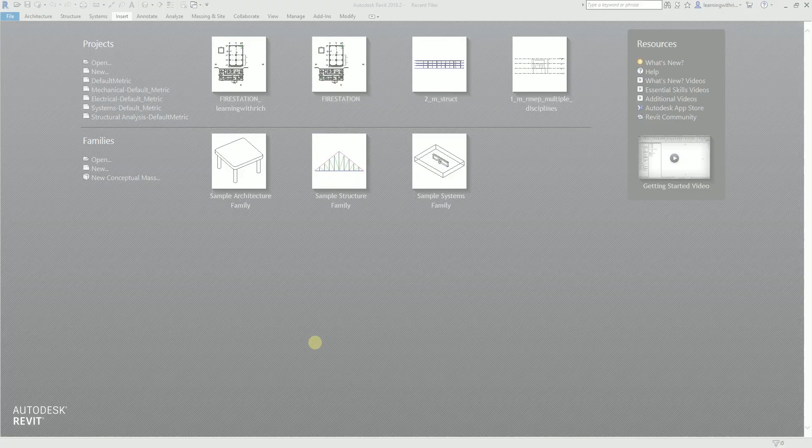In this topic, we are going to continue our discussion about our Revit Architecture Certified Professional Examination preparation. This time, what we are going to discuss is importing drawing and image files. From our previous exercises, we discussed copying and monitoring elements, and we also discussed work sharing. This time, another topic that will show on your examination definitely is importing drawing and image files. So let's get started.

I'm going to open the exercise file for importing. For this exercise, I'm going to teach you how to import a CAD file. There are actually multiple ways of inserting your CAD file inside your project. You can use importing, and you can also use linking. If you have existing designs created using other CAD software, you can actually import or link them into our Revit model to use as a starting point for our design.

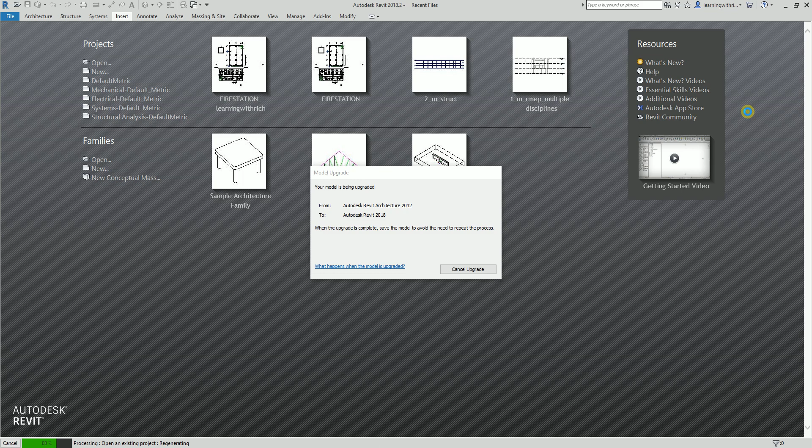In addition to using the Import CAD and Link CAD tools, you can also import CAD files using drag and drop from Windows Explorer into your model, drafting, or sheet view of Revit. That is what we are going to do right now. I'm going to show you how to import, as well as how to link, a CAD file in your project.

If you go to the Insert tab, here you can see Import CAD, and the other one is Link CAD. So what is the difference? If you import the file, you can explode the nested XREF to Revit elements. However, if the XREF file is updated after the import, Revit will not automatically reflect changes to the XREF file.

The other one is Link CAD. If you link the file, Revit automatically updates the geometry to reflect the changes to the XREF files. However, you cannot explode the nested XREFs to Revit elements. So that's the difference: if it is import, once you import your CAD file, you can explode it and then modify it here in Revit, but you cannot update it. If the XREF file is updated after you import, you will not be able to automatically reflect the changes. But with link, Revit automatically updates the geometry, but you will not be able to explode your link CAD file. So basically that is what will happen.

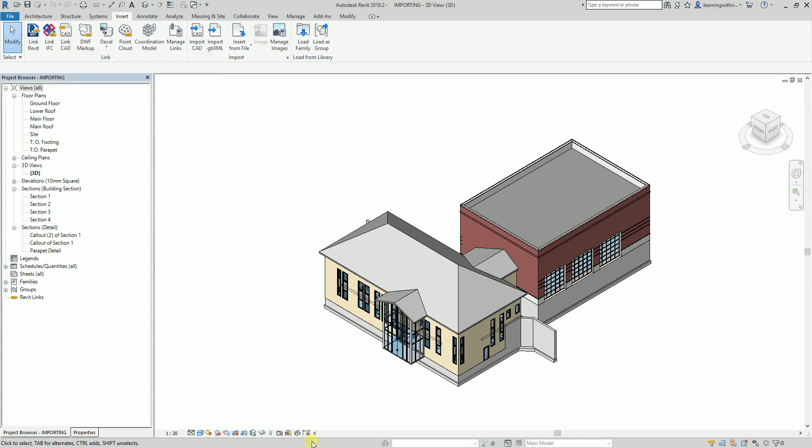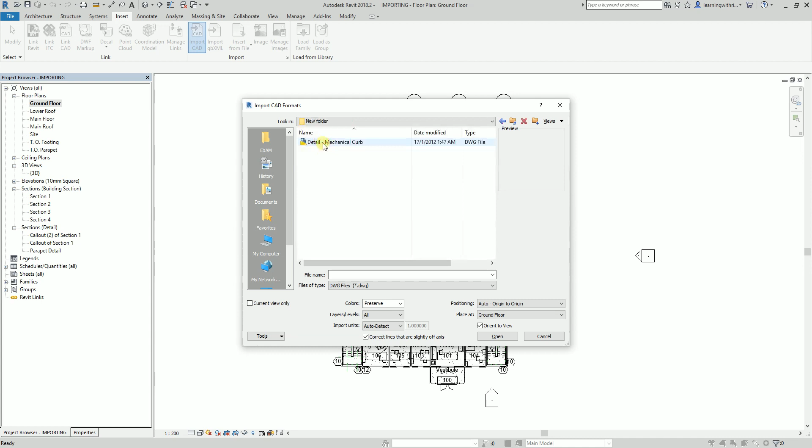So what I'm going to do here is create a drawing. From Insert, Import CAD, importing. I'll try to import this one. I think it would be better if I create a drafting view, so from the View tab, I'm going to select Drafting View. This is the name, I'll just select OK. This is the drafting view.

From Insert, I'm going to select Import CAD and then choose the CAD file, this is my exercise. I'm going to select Manual Origin and then Open. So I'm going to place it here. There you go, and then this is import.

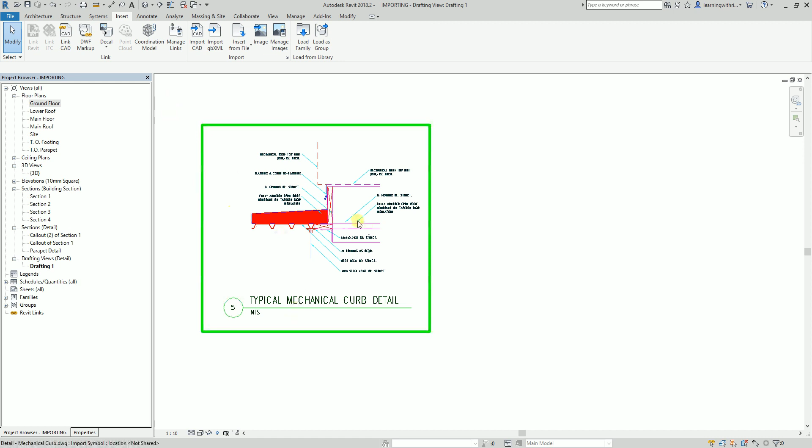If I select the imported CAD file, as you can see, you can actually explode it—partial explode, or the other one is full explode. Now, if the AutoCAD drawing, the XREF file, is updated in AutoCAD, Revit will not be able to automatically update it here.

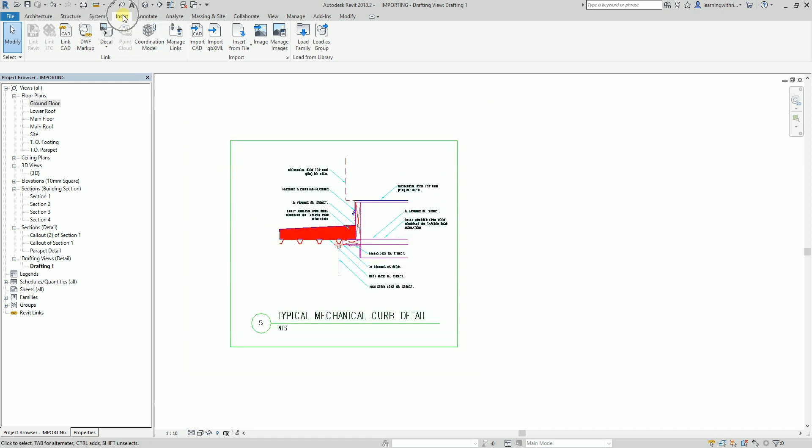The other one is link, so this is another way of inserting your CAD file in your project. I select Link, select the drawing, manual origin, open. So I'll just put it here.

It seems like they don't have any difference at all, but if you select your link model, as you can see, there's no option here for you to be able to explode it. So explode is only available if your CAD drawing is imported.

If it is a link, you will not be able to explode that, but Revit automatically updates the geometry to reflect changes to the XREF file. So if you change the original drawing in AutoCAD and then update it here in Revit, it will automatically update and you'll be able to see the changes.

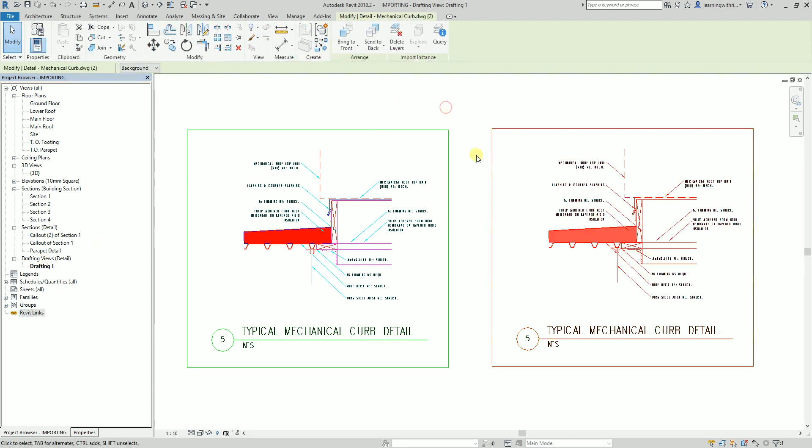But since we are on a drafting view, you will not be able to update this one. Update is only available if you're on the floor plan, 3D view, or section elevation view. But if you're on the drafting view, you won't be able to update it. As you can see, there's no link here. Although you already linked this one, it doesn't detect it because it's inside the drafting view. Anyway, that's basically how you import an AutoCAD drawing into your Revit project.

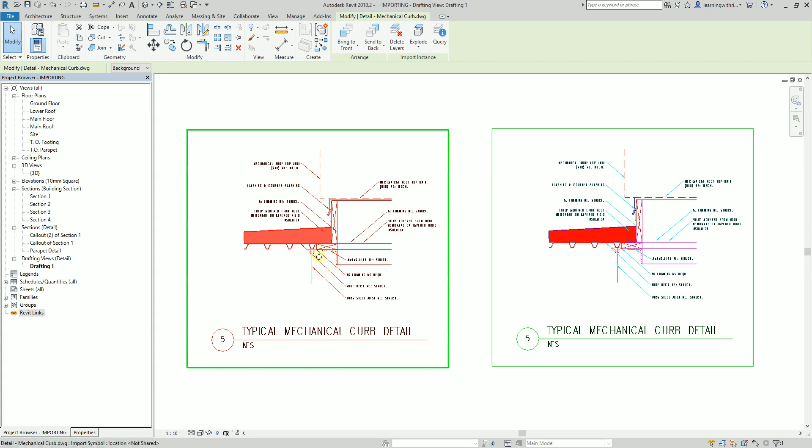So you have two ways: you can import it, or you can link it. If I'm using my CAD file as a guide, I just link it so that the file size won't be too large. But if you're going to use your CAD file as a detail view, sometimes I prefer using an imported CAD file, because I'll be able to explode it and modify the drawing. That's the way of inserting your drawing inside your Revit project.

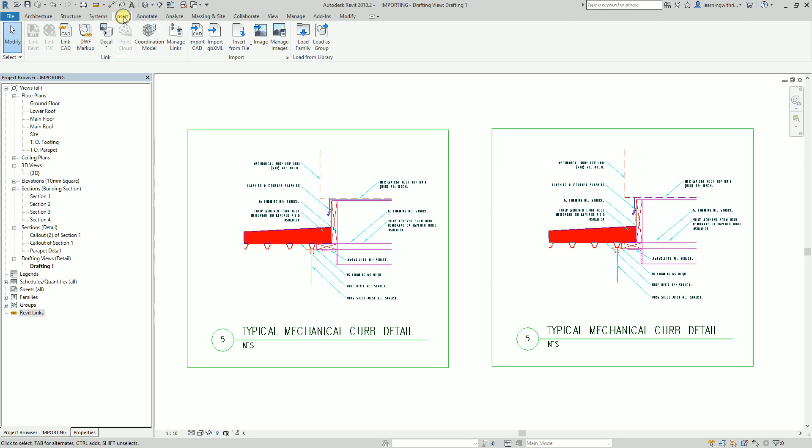So another question that can come up in your examination is how to insert an image file. From the Insert tab, Import panel, there's an image option there. If you click that, you just need to look for the image you want to insert into your project. There's a type of question in the examination where it asks you to insert an image into your drawing, but it's not that difficult as long as you know where the tool is located.

Insert image can be found in the Import panel, you can see the image option there, for inserting a raster image into your project. The other option to insert an image is by using a decal. For example, you can insert an image onto a surface in your 3D model.

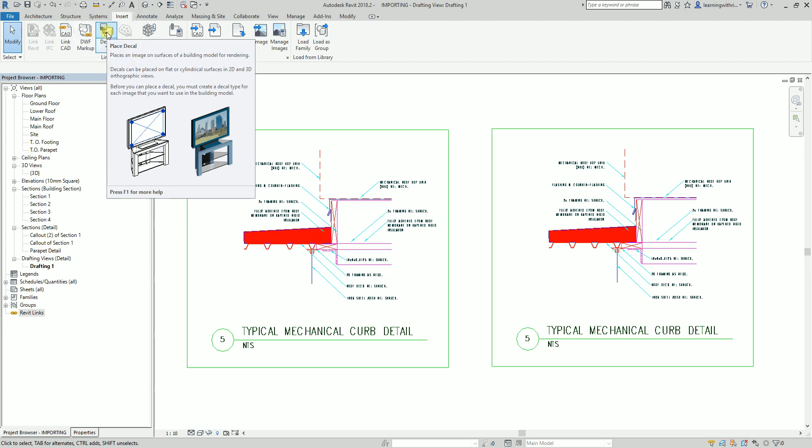There's also a type of question in the examination that asks you to insert or place a decal in your project, so in case you encounter that, this is the location of that tool. Remember this: insert image, decal, and of course import CAD and link CAD, because these will definitely appear on the examination - how to import your drawing, how to insert an image file. So just remember these things.

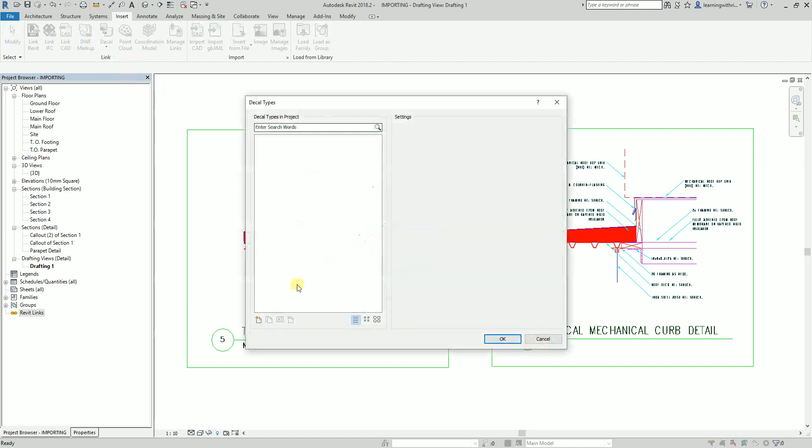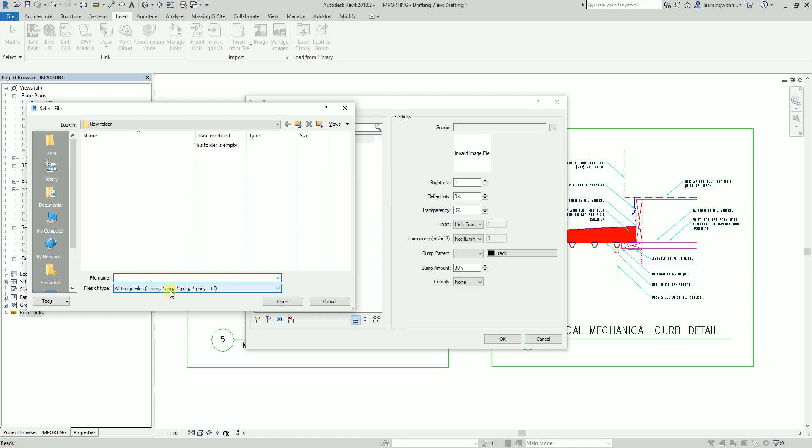So for the decal, if you click that, you need to create a decal here. You just click that and then specify the name - this is your decal. After that, you need to look for the source. You just click that and look for the image you want to place on your model.

So basically that is importing drawings and image files in your project, as part of the collaboration topic. Just make sure you remember these tools: image, decal, link CAD, and import CAD. So there you go, that is our topic for this - importing drawings and image files.